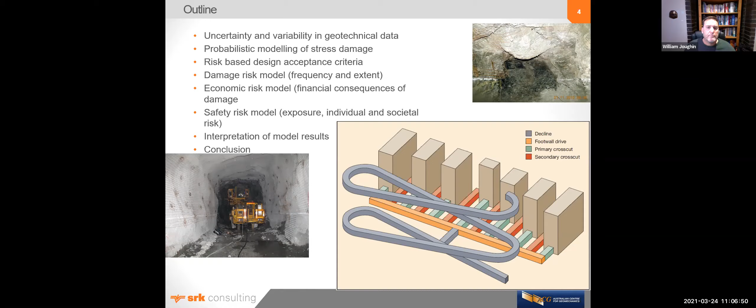Firstly, we talk about aleatory variability, which is simply the random variations or natural variability occurring in the world, including natural variability in rock mass properties.

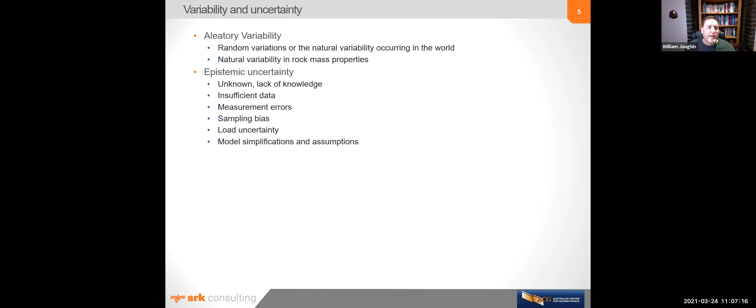And then epistemic uncertainty - this is the unknown or lack of knowledge and insufficient data. Measurement errors, sampling bias, load uncertainty, model simplifications and assumptions all contribute to epistemic uncertainty.

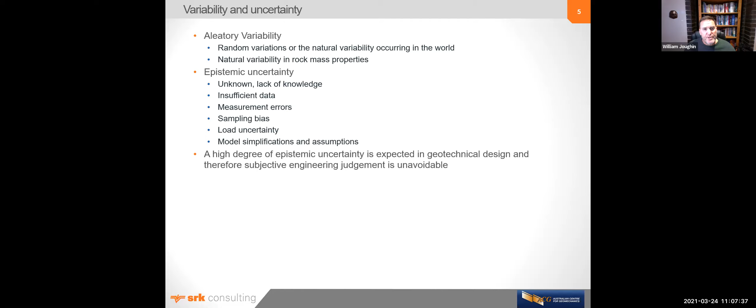It's important to note that a high degree of epistemic uncertainty is expected in geotechnical design, and therefore subjective engineering judgment is unavoidable. This is a quote from Vick in 2002.

He talks about the relative frequency approach, which is the more conventional approach to probability and risk, where the probability of an uncertain event is its relative frequency of occurrence in repeated trials or experimental sampling of the outcome.

But the subjective degree of belief approach is essentially that the probability of an uncertain event is the quantified measure of one's belief, or confidence in the outcome, according to their state of knowledge at the time it is being assessed.

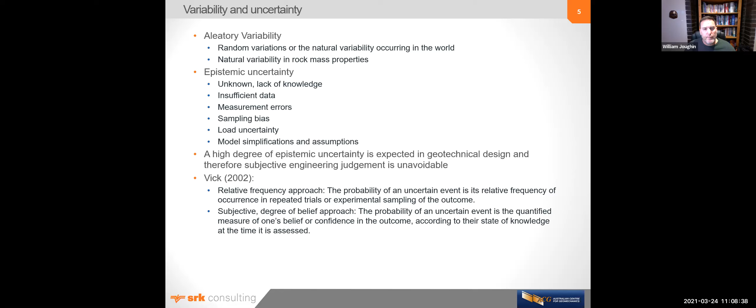Okay, I'll go through this. Normally at the start of any underground project, you would collect data and characterize the rock mass. On the left-hand side, you can see a very competent core in the tray at the top, then some slightly jointed core in the middle, and then highly altered and broken rock in the lowest core tray.

So we naturally have considerable variability, and we need to understand the spatial variability across the area of interest. We need to collect joint data, orientation, and all sorts of information.

In the early stages of a project, you always have a limited amount of information, so there's a lot more uncertainty. You might not have actually characterized your full variability and spatial variability across the area.

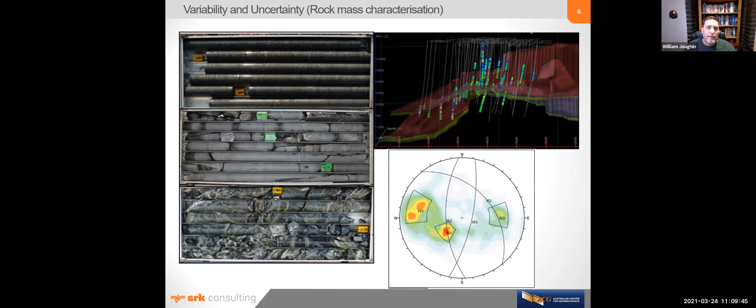And the variability and uncertainty in your rock mass properties - for numerical modeling, we typically use the GSI, the results of triaxial tests and UCS tests, and this indicates the variability there.

Often we start off the project with insufficient data. There is always a sampling bias because of the method that we use for testing - we have to select a sample of a certain size, which means that if you've got quite variable material with some weak material, you're always going to be sampling the better material.

We often have measurement errors. It's important to check whether there's correlation between the different variables when you do probabilistic analyses, to see whether there's a strong correlation between the rock mass characteristics and the intact rock properties, for example.

And you need to establish confidence intervals as you gain more data. I think that Bayesian statistics is a good approach to dealing with this, and there are some excellent papers that have been published by Luis Fernando Contreras.

An important point to note is that particularly when you've got insufficient data, you need to apply some engineering judgment in the process.

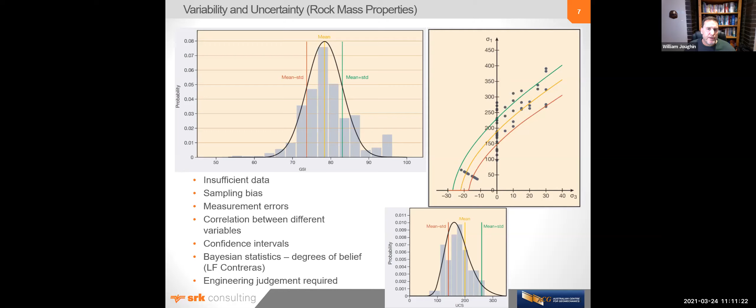In stress measurements, we have quite a high degree of uncertainty. Firstly, because you have a limited number of measurements. Usually the measurements are obtained from overcoring, which normally you can only do once you have access to underground.

You can do acoustic emission stress testing from borehole core, but it's a challenging process, and it is quite possible that you're going to have errors in your stress measurements. If you do a number of stress measurements, you often find there's quite a lot of variability, and whether that is real natural variability or errors in the testing, you need to think about that.

Horizontal stress is always a little bit more unknown and more variable. Your vertical stress is typically equivalent to the density times G times the depth, and there should be very low variability in your vertical stress, but the horizontal stress could vary significantly depending on local conditions. So you may want to incorporate quite a large standard deviation for the magnitude of your stress, and also the direction of your principal stress is something that can vary or could be incorrectly measured, so you need to do sensitivity analyses, and in your probabilistic analyses you can take into account again quite a large standard deviation to deal with that.

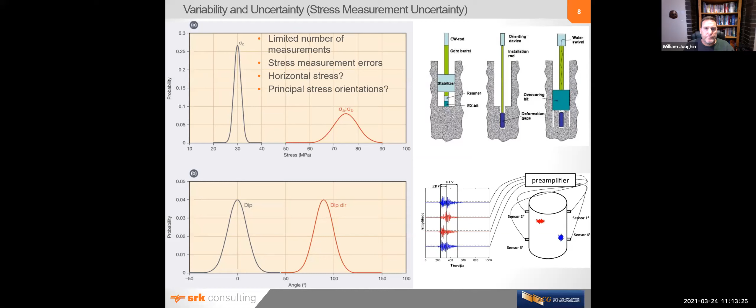So the first probabilistic stress damage analysis that I'll discuss is based on the principle of elastic superposition, and this is covered in a paper published by Johan Wesseloo at a ground support conference in Sweden in 2016. Here we basically took the output from MAP3D, a boundary element, fictitious force elastic model, and we varied the stress, the UCS, and the GSI. In this process, we use unit stresses to characterize the stress tensor. The results of the analyses are then imported into a program called mXrap, developed by the Australian Centre for Geomechanics, and in that we can do a Monte Carlo simulation taking into account the stress uncertainty and the variability of the UCS and the GSI.

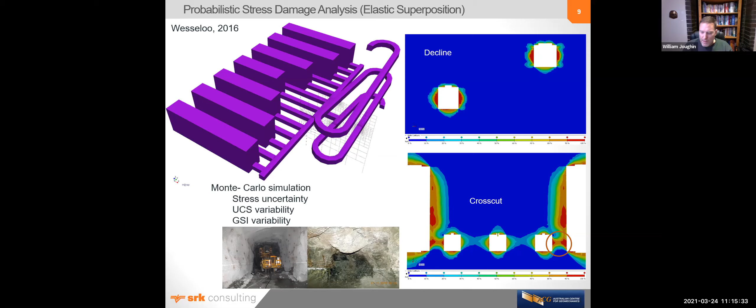Then we also covered a number of elastoplastic stress damage analyses. So this was just a simple 2-dimensional cross-section through a single excavation. Generally speaking, a Monte Carlo simulation is not practical currently because of the time it takes to compute the analyses. So there are other probabilistic methods which may be more appropriate, where you need to run fewer models in order to achieve the results, and the point estimate method is quite well known.

The response surface method, there have been quite a number of papers published recently using this. It's a very rigorous method, but it involves more models that need to be run. And the final one is the response influence factor, which requires the least number of models to be run for the amount of variables, and it's a very effective approach. I don't want to go into great detail on these different methods. I'm presenting here the response influence method.

So essentially, if you have 3 variables, you would need to run 7 analyses - that's 2 times the number of variables plus 1, because you have a base case where you take the mean of each variable, and then you take minus 1 standard deviation and plus 1 standard deviation for each variable, while keeping the other variables at their mean value. In this approach, once you've done the analyses, you actually fit curves to look at the response, and then run a Monte Carlo simulation on those results. It's a very effective and very efficient method of analysis.

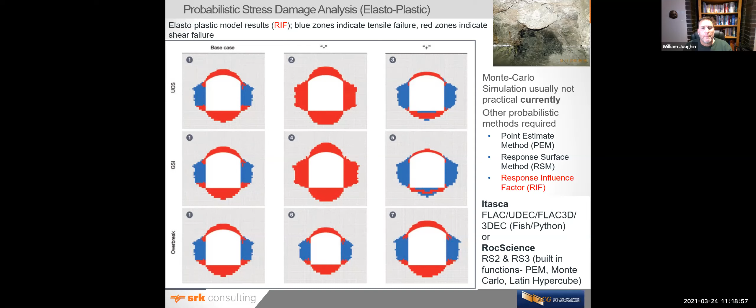And then we take the results of that, and I'm interested in the deformation - what is the probability of the deformation exceeding a certain value. You could take the deformation results directly from the model, but does your model actually take into account the bulking and rotation adequately? So in this case, we've used an empirical approach. We take the depth of failure and multiply that by a bulking factor.

And this was published in the Canadian Rockburst Handbook in 1996. Peter Kaiser does have an update of these bulking factors that has been published in a more recent text. You get more deformation if you have light support for the same depth of failure, and yielding support will fall somewhere in between. If you have strong, stiff support, then you get the least amount of bulking and deformation. So these curves represent the probability of exceedance of a certain deformation for the wall, the back, and the floor for these three support categories.

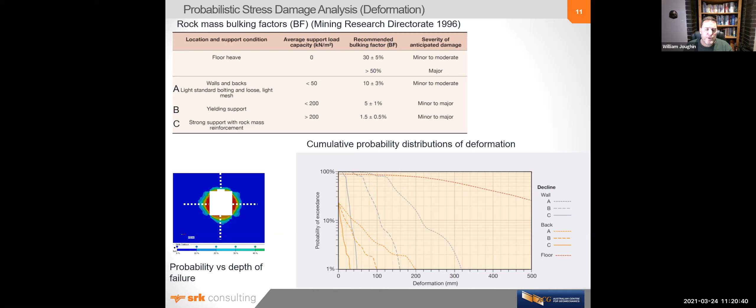So now the big question is, what do you do with these results? Once you've got a probability of failure, what does it mean? We need to define some probabilistic design acceptance criteria. The first question I need to ask is, when is my design good enough? And how will I know? What confidence can I have in my design?

In a deterministic analysis, you would simply look at the factor of safety, which is capacity over demand. But the probability of failure represents the probability of a factor of safety being less than 1, typically, and the risk is the probability of an event multiplied by the consequence of the event. Risk forms the basis for engineering design acceptance, whether it's explicitly quantified or not.

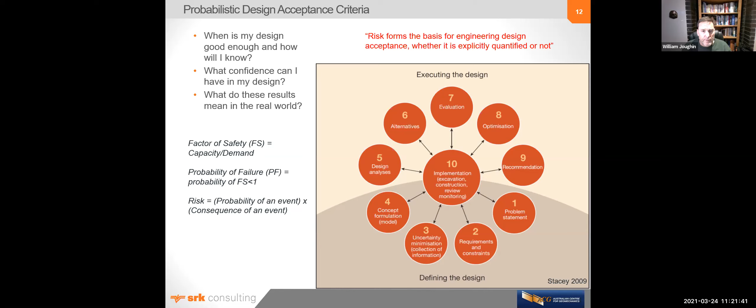I'm not going to go through this design wheel. I guess you can look at it in your own time, and in the interest of time, I'll get right down to it.

In defining probabilistic acceptance criteria, this requires some collaboration between the geotechnical design team and the owner or management. The responsibility of the geotechnical design team is to collect the geotechnical data, interpret data, and construct idealized geotechnical models, including probabilistic parameter models of variability and uncertainty, and conceptual design of different alternatives.

For a factor of safety design, you can do that in isolation. You choose upper and lower acceptance levels for FS criteria, and then perform your design assessment. But for probability of failure, you first need to define those acceptance levels, and that requires interaction with the owner and management. It's their responsibility to define the corporate risk profile and the acceptance level for economic and safety risk. Then the process of determining the probability of failure threshold is done in collaboration. So that's quite an important part.

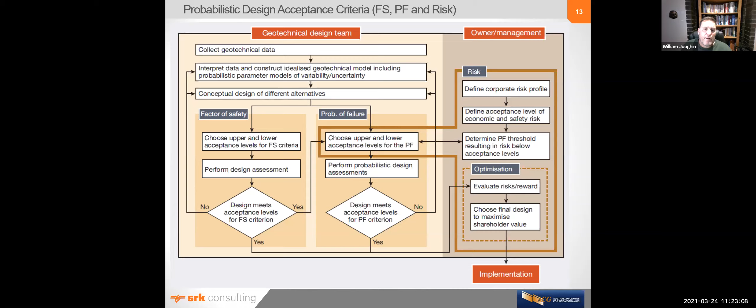The risk models that I'll be presenting now help to close that gap and provide some sort of communication between the geotechnical engineer and management.

For economic risk acceptance levels, most big corporates have defined corporate matrices, and this is a typical one. We have consequence severity on the horizontal and likelihood on the vertical axis. These figures would be appropriate for a fairly large operation.

We can categorize the risk according to this. For this type of analysis, it's quite important to actually put numbers to the likelihood and severity. We can't just use generic terms like highly probable or very likely; we need to express a frequency - daily, monthly, annually, 1 in 10 years, or 1 in 100 years - and then amounts for each of the consequence severities.

Financial losses associated with damage to excavations may include rehabilitation costs, lost revenue due to production delays, and equipment repair or replacement costs. I've highlighted the lost revenue due to production delays in red because this is the most significant cost. If you have any delay that prevents you from generating revenue, that has the biggest impact on the operation because they are unable to achieve the revenue they expect. The frequency and extent of stress damage and size of rockfalls can vary significantly, and the resulting losses can range from insignificant to catastrophic.

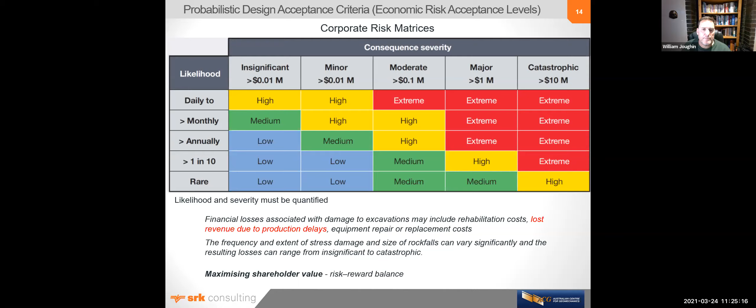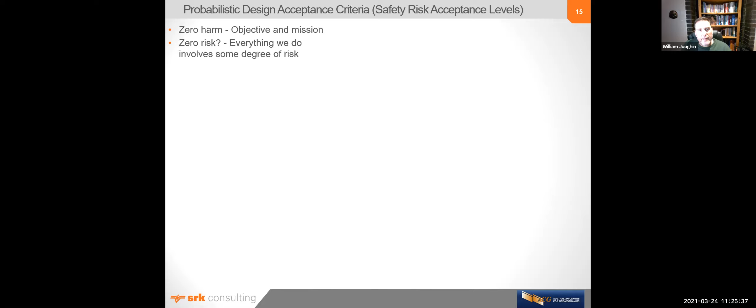Now, safety risk acceptance levels - this is a very different concept. Most operations have an objective or mission to achieve zero harm. Now, is there zero risk? I don't think zero risk exists. Everything that we do involves some degree of risk, and whatever we do should be reasonably safe, while we continually strive towards zero harm.

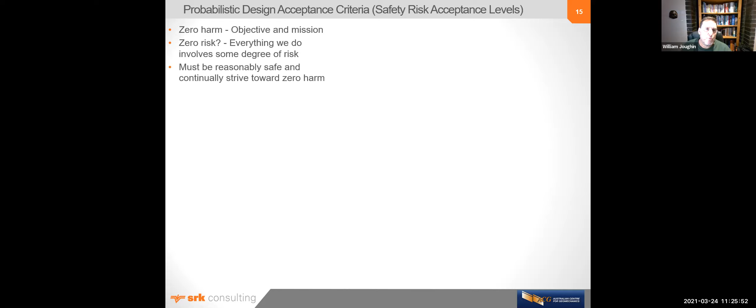We need to evaluate the risk to the individual - that is the risk to any person working on an operation. And then we also need to evaluate the societal risk, which is the effect on the workforce, looking at the risk of having any fatality on the operation.

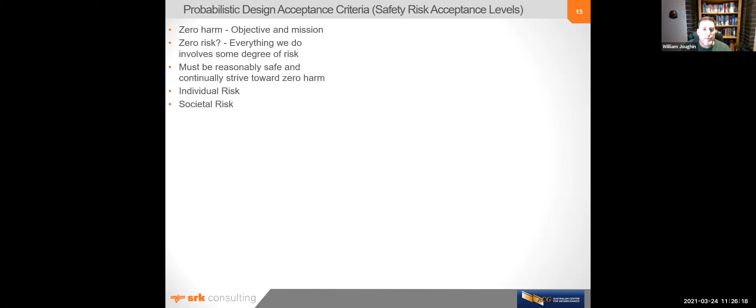Just to put things in context, this is a table that represents the average risk of death to an individual from various human-caused and natural accidents. This comes from the United States Nuclear Regulatory Commission. Just to get an indication of the numbers, for a motor vehicle accident, we're looking at about 2.5 times 10 to the minus 4.

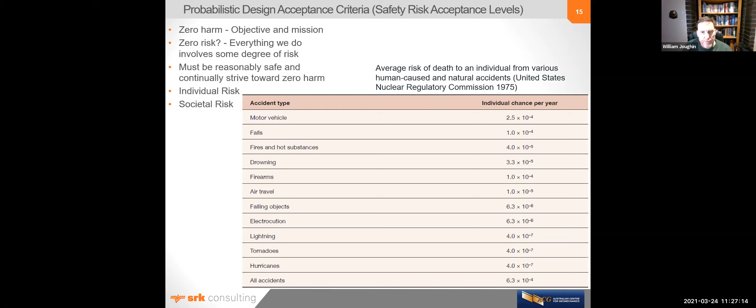It's quite interesting - the Australian numbers come out very similar to that. In South Africa, we're probably about an order of magnitude higher. So the falls, drowning, firearms, air travel, and so on - you would expect air travel to be a lot safer, at about 1 times 10 to the minus 5. And then there are other risks such as lightning, hurricanes, and all accidents combined would be about 6.3 times 10 to the minus 4.

This is an approach presented by Jonkman et al. in 2003, quoting Bohnenblust and Vrijling. The concept introduces a policy factor, beta, where your individual risk should be less than beta times 10 to the minus 4. We look at different risk categories.

When people are doing work that is completely voluntary and getting a direct benefit from it, that policy factor would be 100. It moves down to involuntary, where we may get some benefit or no benefit at all, and have limited control in preventing an incident.

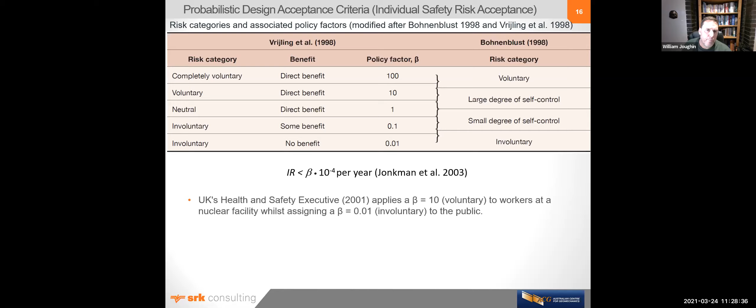For example, the UK Health and Safety Executive applies a beta of 10 for voluntary risk to workers at a nuclear facility, while assigning a beta of 0.01 for involuntary risk to the public. These are quite far extremes, tolerating a higher level of risk for people who are choosing to work in the facility.

But in mining, we need to assume involuntary risk for the mining workforce unless it can be shown that the individual was empowered and cognitively able to consciously accept the risk in exchange for perceived reward. This was quoted by Terbrugge et al., and they chose an acceptance level of 10 to the minus 4, which would equate to a beta of 1.

This was also published in the large open pit guidelines. But my colleague Joughin suggests, influenced also by the Hong Kong guidelines, that an acceptance level for individual risk of fatality of 10 to the minus 5 to 10 to the minus 6 is perhaps more appropriate.

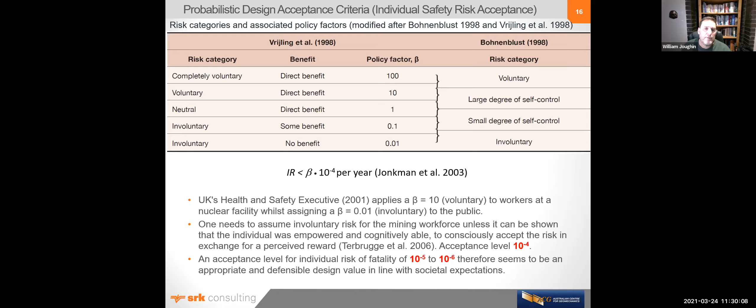But I don't think that should be the geotechnical engineer's decision. I think this is the executive's decision. It needs to be made by the executive, and it should be in line with societal expectations.

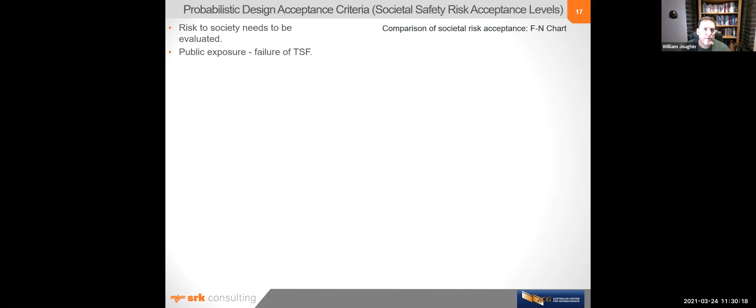For societal risk, we need to look at the evaluation to society. One way of looking at it: a good example is public exposure when there's a failure of a TSF. The public is rarely at risk from underground excavations, etc. There's a great deal we need to consider.

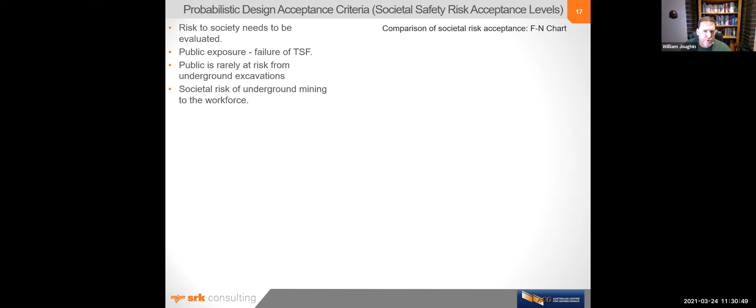And this is an FN chart.

William, I think your audio is cutting out. It seems he's maybe experiencing some internet challenges. Hold on one second, guys. Let's see, stop that video.

There we go, and we're back. Well, William, you're still muted, but we can see you. Okay, apologies for that, I seem to have lost the connection, and I think I need to share my screen again. I'm taking a bit longer than I should, so I'll try to move through this quicker. Can you see the presentation currently? We can. Okay, I just need to organize my screen.

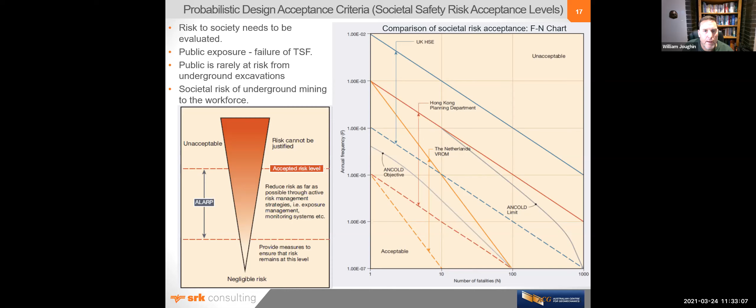My colleague Joughin has used these guidelines from the Hong Kong Planning Department and applied them to... I think I've skipped a slide, or it's missing.

These are upper acceptance levels, representing the upper level, calculated for different lengths of exposure. The lower acceptance level will typically be an order of magnitude lower. We typically use beta equals 0.1 for the upper level and 0.01 for the lower level, the same beta presented earlier.

This was calculated for underground exposure, for example in a tunnel, for those distances as indicated there. And we applied these in our analyses.

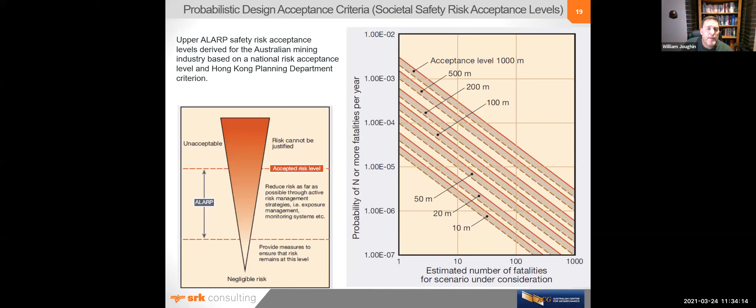Coming back to the analyses, I have a damage risk model. In a scenario, I look at 3 different types of excavations, and I looked at the potential damage.

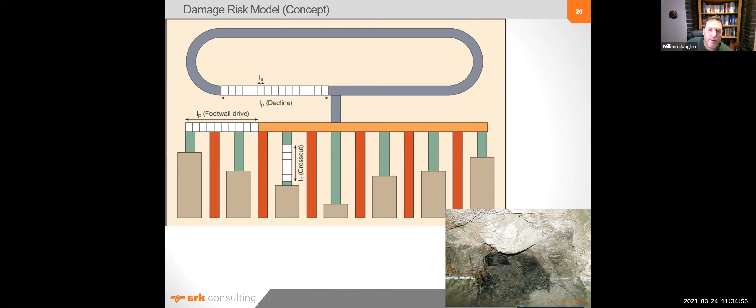LP represents the length of potential damage, and the individual squares represent the variability in rock mass characteristics. So it's a discrete interval across the length of the tunnel, and my model represents the probability of failure in any one of these discrete intervals.

So it's the probability of having either 0 segments damaged, 1 segment damaged, or 4 segments, 9 segments, for example. And these segments need not necessarily be contiguous, but they would have an impact.

So we can look at the number of lengths of potential damage that I...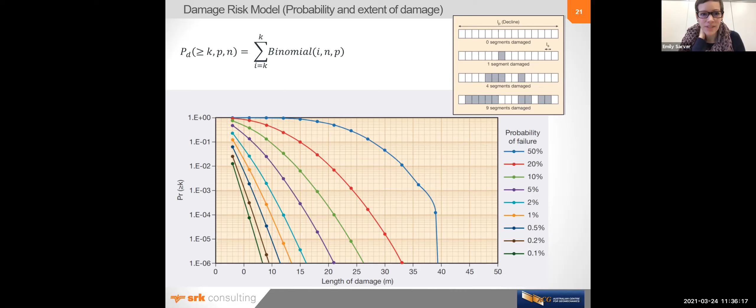I wonder if maybe we should turn off, maybe the video is creating some challenges. Oh, there he is. Sorry, you got to go through it again. We might stop your video feed, William, and see if that will help the bandwidth, if it's there. Okay, all right, can you all see it? We can.

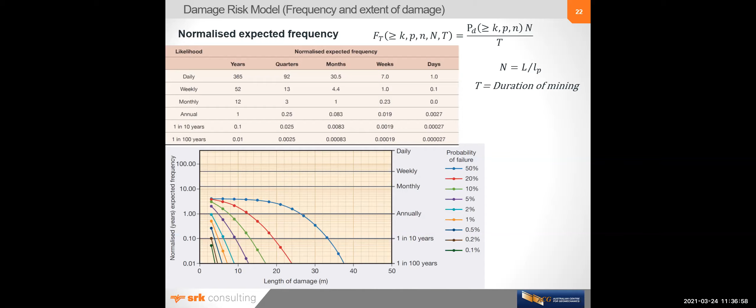Okay good. So we need to get the time component in here. So we've now converted, as I say, this probability to a frequency. And then I need to look at the consequences.

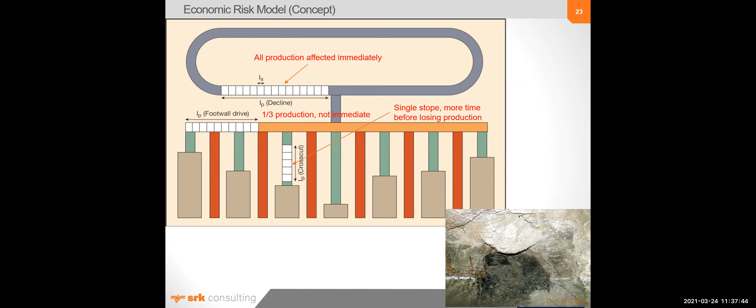So if I have damage in my decline, I'm going to affect all the production immediately, so it has quite a significant consequence. If I have it in my footwall drive, it may only affect a third of the production, and you might have some flexibility built into the system, so it may not be immediate. And in your crosscuts, if you've got a number of stopes available, you might have some flexibility built into the system, so that would also give you more time before you lose production, and it only affects a single stope.

So we can quite easily develop a model to calculate the rehabilitation cost per meter that is damaged. And then we can calculate the lost production, which is essentially the days lost multiplied by the revenue per day. And the days lost is essentially the time it takes to rehabilitate and get that excavation operational again. And so that's how we deal with the economic risk.

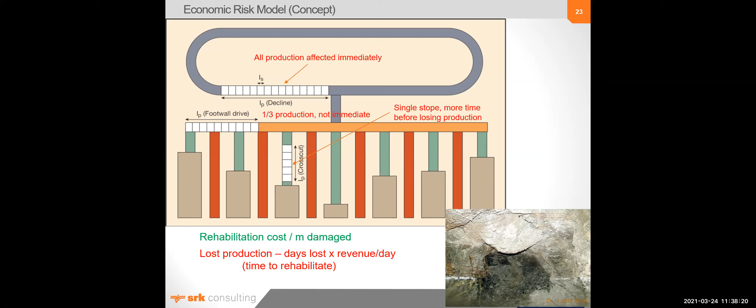And then those frequency damage, cumulative frequency damage curves can then be converted and plotted onto this. So we multiply them by the cost. So these are risk profiles for different probabilities of failure.

We're trying to define acceptance criteria. So what we're looking at here is that if our guideline is we don't want to tolerate more than moderate economic risk, then we would select a probability of failure of 2% in this particular case.

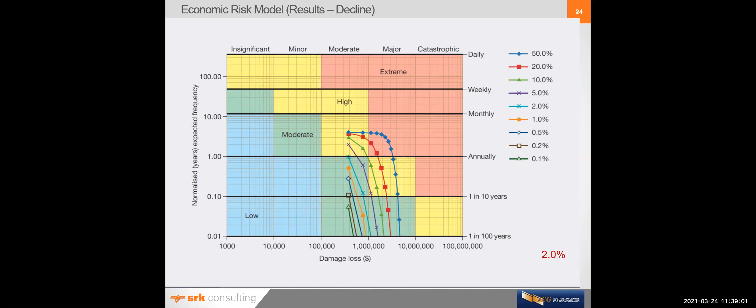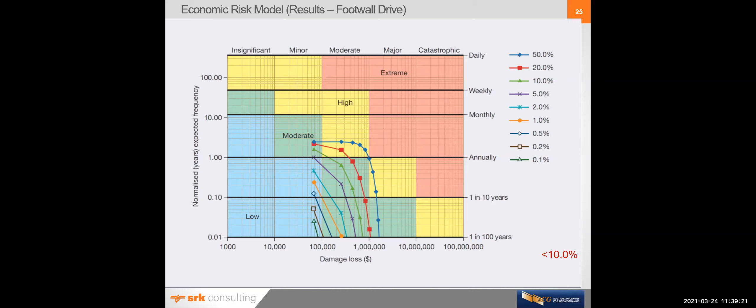And then I'll quickly skip through. You can see for the footwall drive, the curve shifts to the left and down. All the curves shift to the left and down because of the different profile. And if I could probably, for the moderate case, I can get away with a slightly less than 10% probability of failure in the footwall drive to manage my economic risk.

And for the crosscuts, we have many, many crosscuts, so we have much higher frequency of damage, but the severity of the damage is far less. So the curve moves to the left and up. And again, for our moderate case, the green curve falls within the moderate risk, and we could select a criteria of 10%.

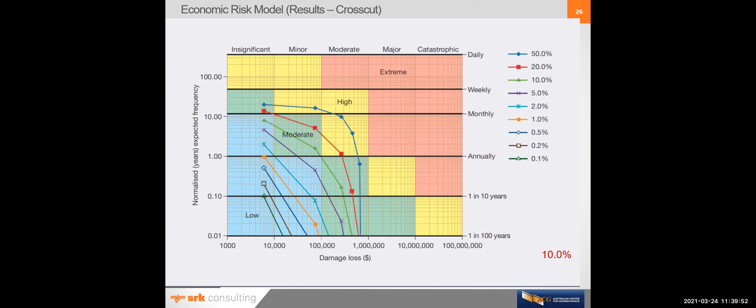But that's just the economic risk, and this is just quickly comparing the three graphs. But when we look at safety risk...

We need— I've made an assumption that because the damage does not necessarily represent a rockfall, because not all the bolts will necessarily fail, particularly if you have a good ground support system in place. That number, I don't know exactly what it is, and that's something that would be nice to know.

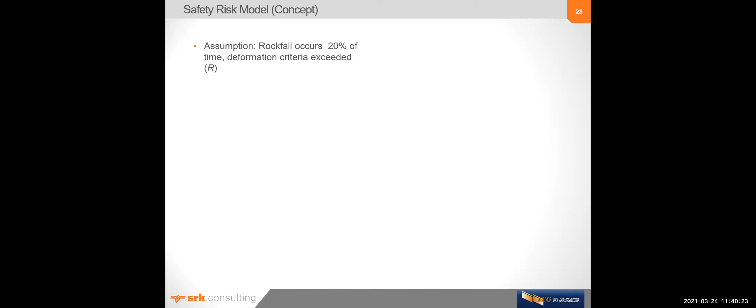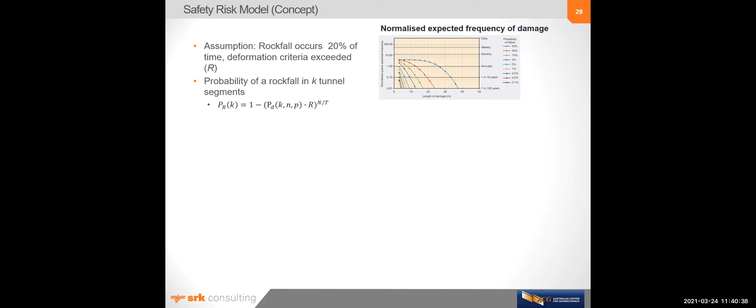But so we can now determine the probability of having a rockfall that affects a certain number of tunnel segments, so a rockfall across a certain length of tunnel. Effectively, that's what I wanted to get to.

And then I need to look at the temporal and spatial coincidence. So the spatial coincidence is being in the wrong place, and the temporal coincidence is being at the wrong time, being there at the wrong time.

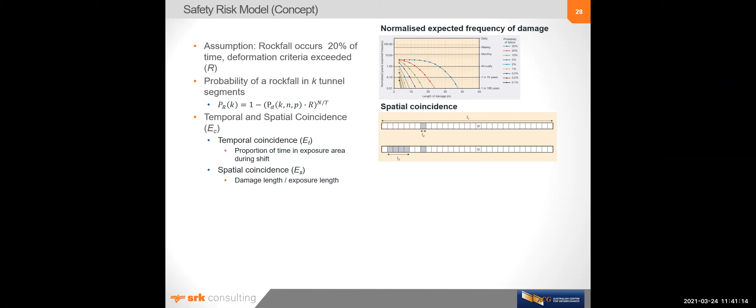So we look at the amount of time that people expend in the exposure area to look at the temporal coincidence. And the spatial coincidence is simply the damage length divided by the exposure length. So it's really just the probability of being in the wrong place at the wrong time. And then you can take into account risk mitigation in the model.

So monitoring, if you're doing very good monitoring, there are very good techniques these days with SLAM technologies, simultaneous localization and mapping, or LiDAR and mapping. You can get closure measurements and determine whether your support is under risk and whether there's a risk of a rockfall, and you can stop and rehabilitate. That can be used to mitigate.

So if you've got very effective mitigation, you can apply a low factor for monitoring. And then the vulnerability, if you've got a mechanized environment, people will be some distance away, perhaps, and working under a canopy, so they might have some protection, which can be used. So you can build your mining safety principles into the safety risk model.

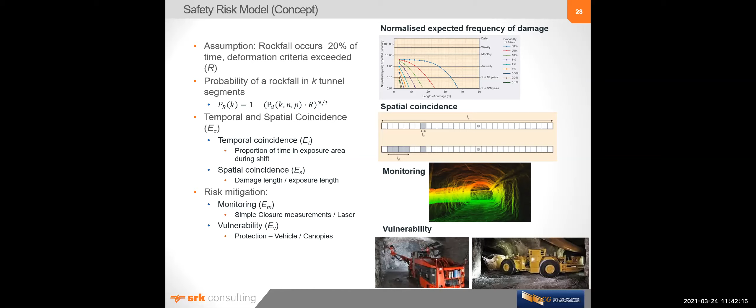And then it's simply looking at the exposure analysis. You need to do a detailed analysis to look at where people are exposed and how much time they're spending in those different areas. So we might have unprotected personnel coming to map a face or to do a survey or something like that, but they have a very low exposure, they don't spend a lot of time there. But you might have an operator working in a vehicle that will be protected, but they will spend a lot of time in those areas.

And you'll have people traveling. And so there are equations presented to build an exposure model, a safety risk exposure model, and the equations are presented in the book.

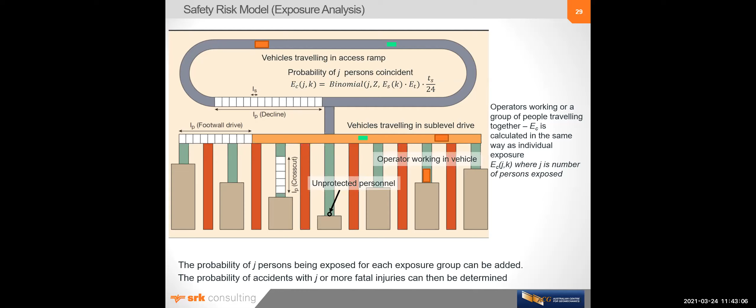And so in the same way, I can plot these probability of exceeding N or more fatalities in one year. So I have these curves that represent that. In an environment where you don't have a lot of people working in one place at a time, it's unlikely that you're going to have a large number of fatalities.

In a South African mine, you might have 10 people in a particular working place at one time, so these curves will be a lot flatter, and you're more likely to have 10 people trapped or killed, so you would have a much flatter curve that would extend out. So these curves represent the societal risk curves, and the little dots on the left-hand axis represent the maximum individual risk for a particular situation.

So in this case, my societal risk as well is within the ALARP region, but I need to make sure that my individual safety risk, with a 10% probability of failure, is actually dropping below 1 times 10 to the minus 5. So I could get away with the 10% probability of failure and still meet my safety criteria.

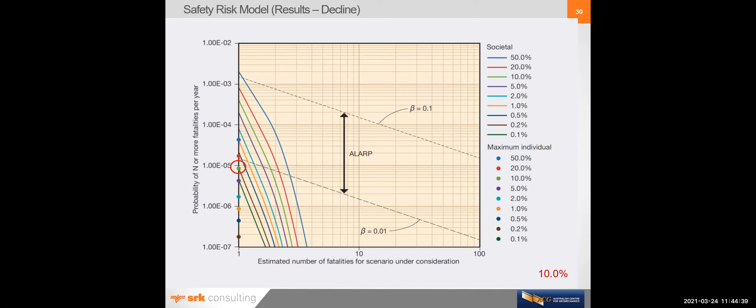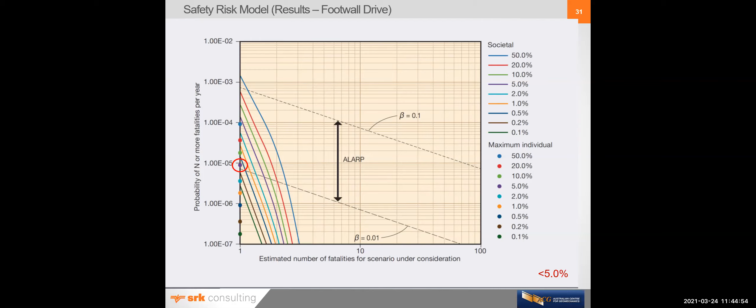However, my economic risk criteria says 2%, so I would be using my economic risk to make a decision in this situation. So in the footwall drive, I apply the same principle, but now I need to be less than 5%. So while my economic risk criteria says 10%, this needs to be less than 5.

And then for my crosscuts, here I also need to get at least below 5%, but even my societal risk is really quite close to the upper limit. So maybe I would even want to drop it more, but that would obviously add additional costs.

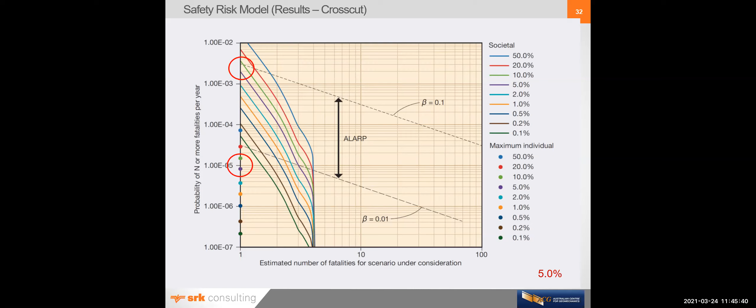Because if you're in the ALARP region, as I mentioned before, you'd actually want to move, you want to be trying to strive to move down. So you would be trying to do things either by minimizing exposure of people, or by putting more support, or by changing your design. So the top two graphs represent your acceptance criteria.

So for the interpretation of the decline, my economic risk criteria is 2, safety is 10%, so I'm going to choose 2%. There's my 2% graph. So I need to choose a support system that is capable of absorbing.

If I choose a stiff support system in the back, it would need to be able to accommodate looks like about 20 millimeters of deformation, and then for the wall it would need to be able to accommodate about 50 millimeters of deformation. So even though it's stiff, it needs to have some ductility in the support system.

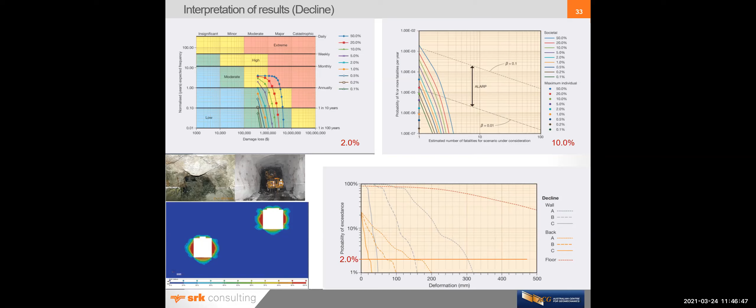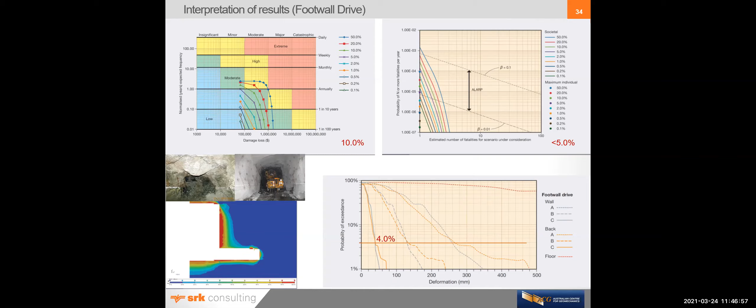And then here for the footwall drive, I'm going to use, I said I needed less than 5%, so I've chosen 4% to look at that criteria.

And when I get to the crosscut, I have a bit of a problem because my walls continue to deform, but it's the portion adjacent to the stope. And the way to deal with that actually is to do just-in-time mining. So you only develop that crosscut after the adjacent stope has been backfilled and filled, and then it actually won't see that amount of deformation. So there are ways of getting around it.

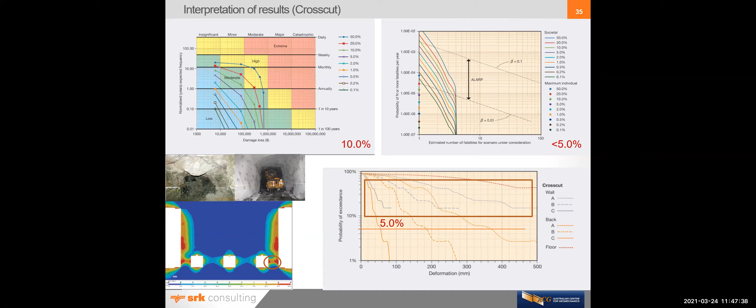So that brings me to the end, and I'll just do my conclusions quickly. So this process is applicable for geotechnical analysis and design, and takes into account geotechnical uncertainty.

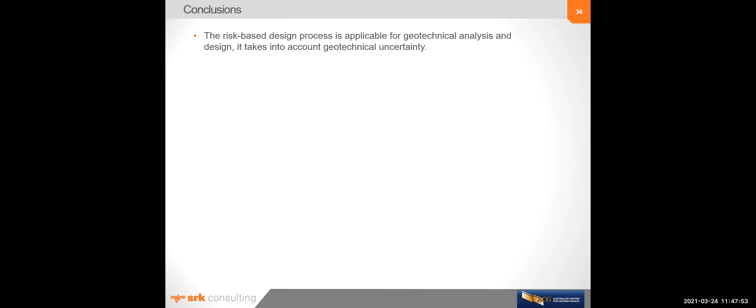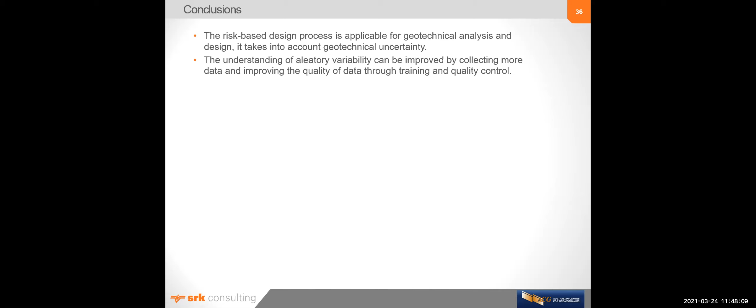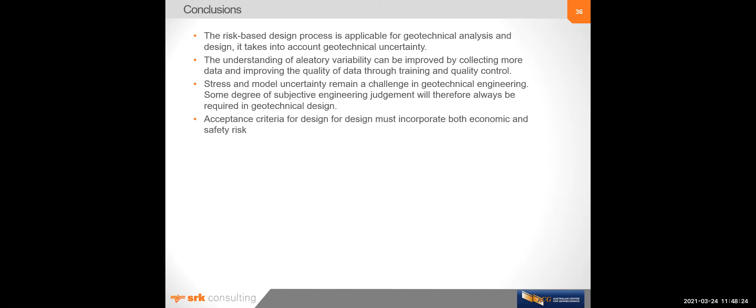The understanding of aleatory variability can be improved by collecting more data and improving the quality of data through training and control. As your project gets more advanced and as you're implementing, you would get a much better understanding. So stress and model uncertainty remain a challenge, so there's always going to be some subjective engineering judgment required.

We need to incorporate both economic and safety risk in our criteria. At the start, I talked about the relative frequency approach, used by the insurance industry, where you have large amounts of data available and it's possible to assess the potential risk quite reliably. But when you're dealing with more uncertainty and high consequences of events that don't occur frequently, it's absolutely necessary to incorporate a subjective degree of belief approach.

If you've got good data, that'll improve the confidence in the outcome and the degree of belief, but the interpretation remains subjective. And I think that's all I have. Apologies if I've gone over time.

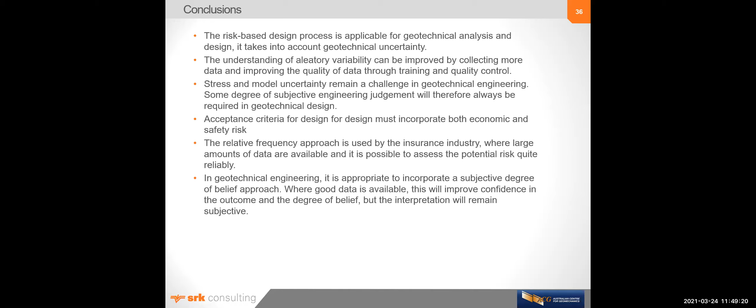No, you're fine. Thank you. So do we have questions?

Yeah, this is William speaking. I have quite a few questions. I don't know if you can hear me or not. We can hear you, yeah.

So just for... William? We can't hear you anymore. William, you're really breaking up. Is there a way that you could maybe type your question? I know that's probably a long question, but your internet seems to be very spotty. Sure, yeah, I'll type it out. Or if you can maybe try turning off your video as well. Yeah, yeah, okay, can you hear me clear now? That sounds a little better. Yep, okay. Now we lost it, okay.

In the meantime, are there other questions? Hello, I would like to ask a question to William.

So how do you see these risk-based design approaches being broadly implemented in the industry? Considering that regulations are getting stricter in many countries, do you think this is something that's going to have to be implemented for all mining at all scales, or do you think this is something that just the biggest companies, the ones that have an actual concern on safety, are going to implement?